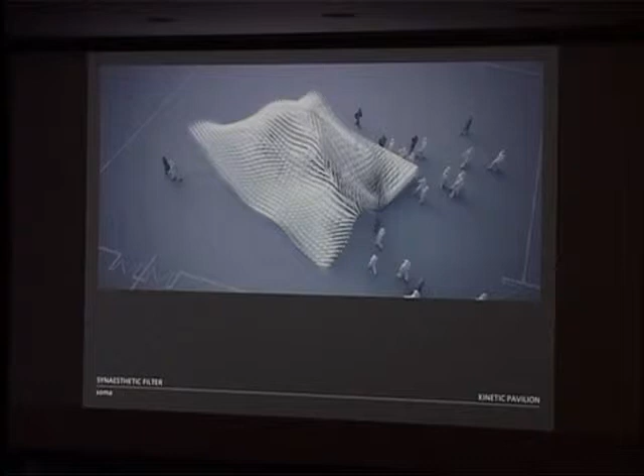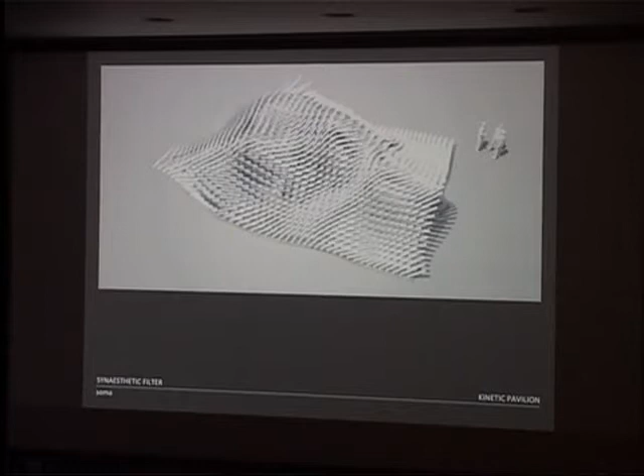Another reoccurring theme in our studio—these are now really very old projects, the projects we started our studio with—but a recurring theme is movement. We're really interested in how perception and kinematics are intertwined. This is a very early competition scheme for the new opera in Berlin, where we were trying to combine acoustic and visual triggers and create a music pavilion that we called a synaesthetic filter. By the simple movement and rotation of these reflectors, it would combine visual and acoustic qualities of the space and create these instruments composers and musicians could play with.

Another theme that we share, another interest, is our fascination for masses and volumes. So we're really interested in very simple elements that build up complexity, doing this by rules you can manipulate.

We call these vague formations, not only because the boundaries tend to be undefined or can grow or extend, but also because they have a certain potential to be expressive and evocative, and to be read and interpreted in many different individual ways by users. So they also have this kind of openness.

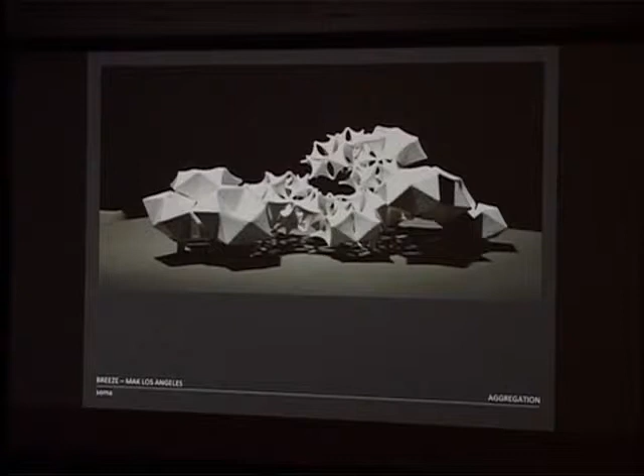In this case, this was what we did at the Schindler House. We were studying growth patterns of corals, and the base element is an octahedron that can change its state of phase from solid to sparse. We built it at the Schindler House as an installation that was actually breathing.

We had a latex skin and vacuum, and the breathing cycle was quite slow. It took like 15 minutes, so it was really at the border of noticeability. We really like this notion of a living organism.

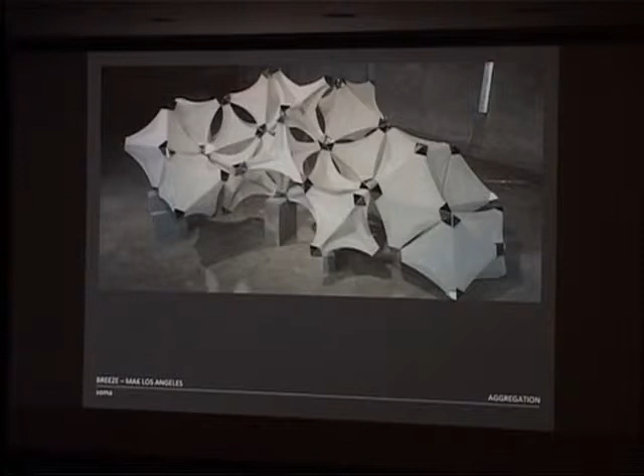We really understand design as an ongoing process that has to be explorative, and our projects are rather outcomes of this process. So we're always happy if we find a brief or a competition where we can test something we have developed. This was this lucky case when we did the mobile art pavilion for the Salzburg Biennale.

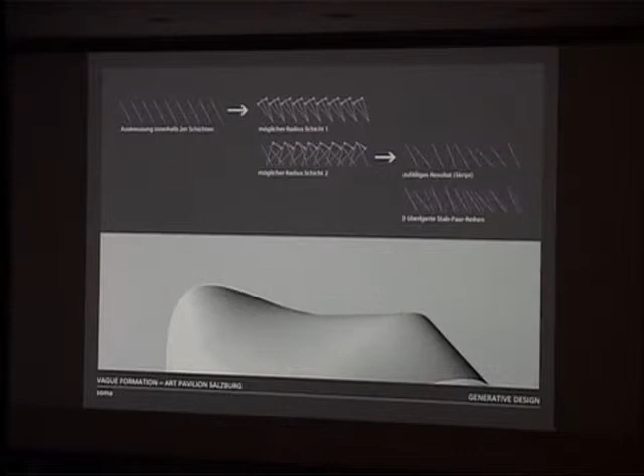What we took as a starting point for our proposal was the idea that rule and variation is inherent in architecture as well as in music. Contemporary music might sound really strange to our ears, but as soon as we start to engage with it and read its structures, we can really explore the very defined and controlled rules. So again, the rule is rather simple.

Layers of sticks in opposing directions create, in principle, a rather weak structure, and then by changing the angle they become performative, creating a stiffness that's really very amazing. So we wrote this random script and just played with it, trying to find out how many sticks we need to create this mass-like appearance, testing and doing loads of variations with these linear elements.

The idea was really to create this flickering mass we would put there on the Mozartplatz, and we were also testing it in physical models, so that's really how we work. We do not believe in hand drawings anymore. We do hand drawings if we need to communicate very quickly in the office, but we rather like to do these three-dimensional diagrams and then really test the architectural effects spatially.

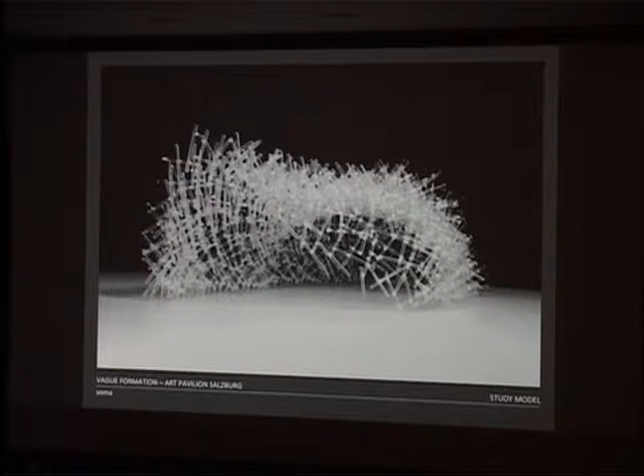What we were lacking, or what these outputs of this script did not have, was a structural evaluation. So we teamed up, as mentioned before, with these amazing engineers, Bollinger, Grohmann, Schneider, in Vienna. We are really happy since Klaus Bollinger was also our professor at the University of Applied Arts in Vienna, so this is really also something that helped us a lot doing this project.

They are doing research at the University of Applied Arts with irregular structures, and they're also developing a tool called Karamba, which is a plugin for Grasshopper. Together with them, we built up a parametric model where we could control and evaluate the structure. The great thing is that you now have a shared platform, so the engineer and the architect both manipulate the structure in one program. It's not a before and after, but really a simultaneous process.

So here you see how the evaluation takes place. The sticks start to move slightly and search for an improved position, so to say. They try to reduce the joints and the distance between them, since joints means money.

By doing that, they also enhance the structural performance and decrease deflection or deformation. In yellow, you see the deformation and how it gets better and better, until in the end the white and the yellow overlay. So then you have a so-called optimized structure, of course, within the architectural intentions.

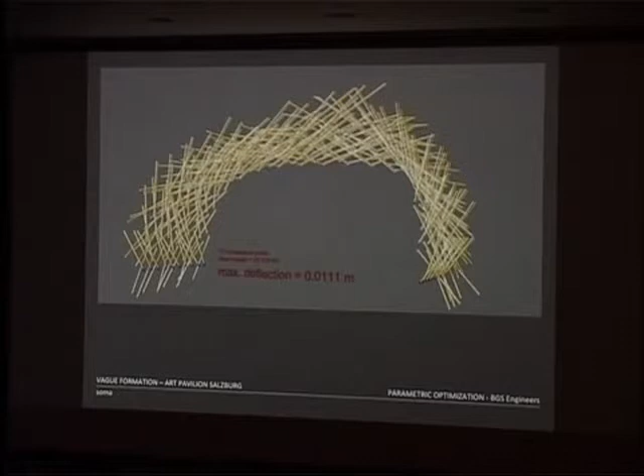All the 1,500 aluminium sticks are the same, but they all have different joints, so it's actually a huge puzzle. Logistics becomes a crucial topic. You need to really name everything. So the model rules everything. The digital model is really what you are working on.

You do not draw any more plans, since this would not have any sense. The only plans we were drawing were the ones we needed to get the building permission. Everything goes directly from the model to the CNC machines. And here you see also the picture.

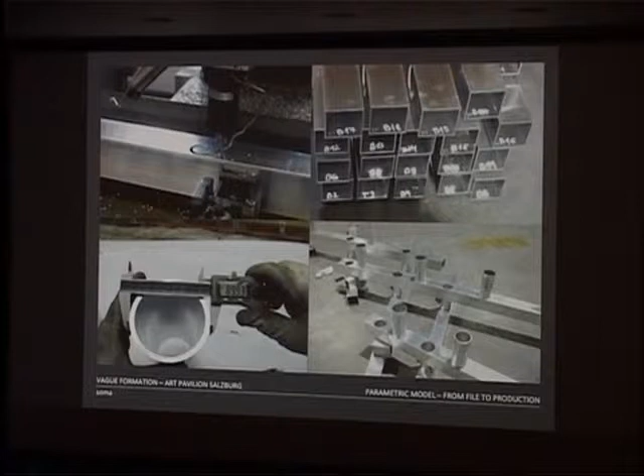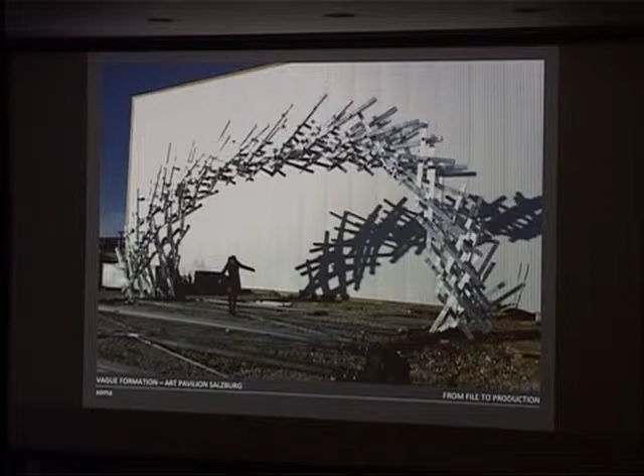And this is the mock-up. We had to test if the deformation was really not taking place at all, because all the parts had to fit together. And we were also testing how these parts could be handled, so they could be transported to the different locations of assembly.

Also, the interior is very modular, so you could react to the various events they would like to have in the pavilion. After it was used for the Salzburg Biennale, they also rented it out to other festivals. There were art exhibitions, design exhibitions, lectures, all kinds of events taking place in there.

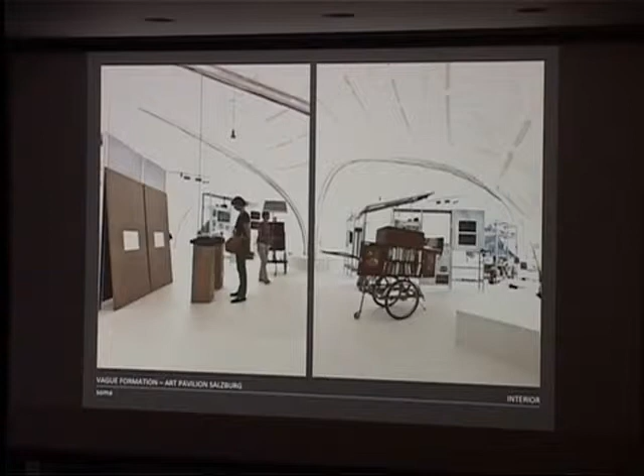And we also had an interior membrane, since we also needed to protect it from rain, but you could also assemble it without the membrane.

Yeah, this was the first assembly spot in Salzburg. It really got lots of very positive response from the audience as well as from the public, and it really was that strange appearance we were hoping to get. And when it was emitting these amazing sounds, it really was a perfect match for the music we found.

And then it traveled to the rural valley of Krakautal in Austria, and it was really interesting how the change of the context not only changed the reading of the structure itself, but also changed the reading of the context. And it got even more weird when the artists took over with their strange ceremonies and performances.

After that, it traveled to Maribor, and in the next 10 years it will be used, hopefully, throughout Europe. It was also nominated this year, among many projects, for the Mies van der Rohe Award. So we were also very happy and delighted about that.

The next project is the one that helped us get the job at the Bartlett, as you all know now. This is the competition for the Taiwan Tower. Actually, it follows quite the same idea as the Salzburg Pavilion, only in a much larger scale.

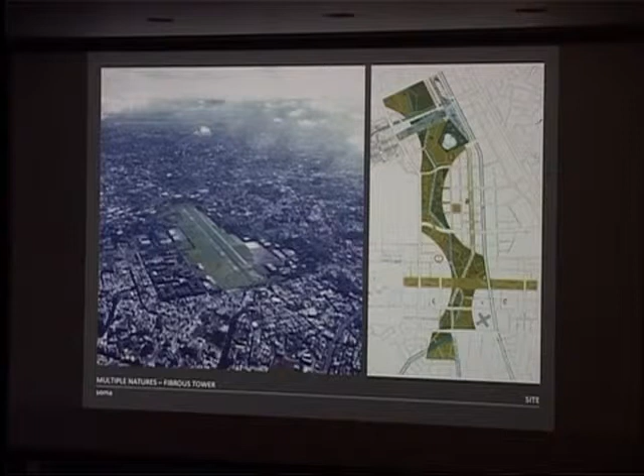The whole city development is planned to be zero carbon. So we were also looking at certain principles in nature, not only to get inspired and to get a geometry out of that, but also we were looking for certain principles we could embed.

The other idea, I think we can't really see that so well now, but the other idea is to invent a new tower typology. Usually these observation towers have these cores.

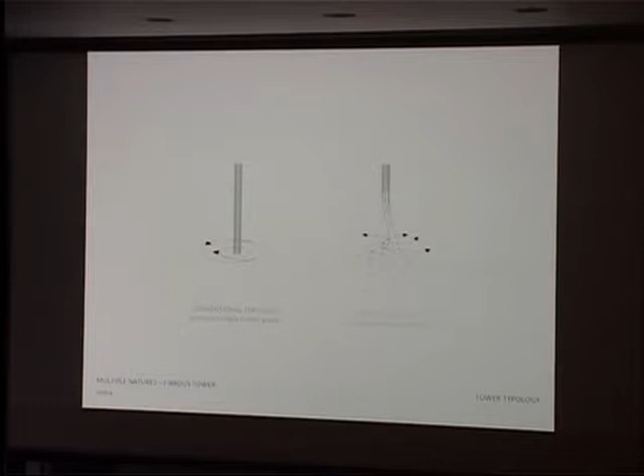You enter, and then by magic you reappear 300 meters up in the air, and you have this gap of experience. We proposed an open tower typology where you could experience all the areas of the tower, an open and free zone where you walk underneath the tower, and travel up between and along these open legs. So the tower creates an open field that is then filled up by the museum, and the park flows freely beneath the tower legs.

Here you see the ensemble of museum and tower and all the platforms, the intermediate platform in the middle of the tower and also the head. You're moving in transparent capsules along these legs, and it becomes a spatial, three-dimensional experience where you also have a changing panorama of the city and the surroundings.

When we got interested in these fibrous structures, we were looking again at natural principles, swarm behavior and plant movements, to understand how we could organize vertical linear elements to create synergetic wholes. These tests informed the tower's geometry as well as its organization and structural behavior.

It's really the way we start in the office, sketching three-dimensionally and collecting these ideas that inform the design. Here you see the fibrous tower again, these bundles of tower that have sub-bundles, so to say. It's all one profile of 35 centimeters diameter that builds up the whole tower.

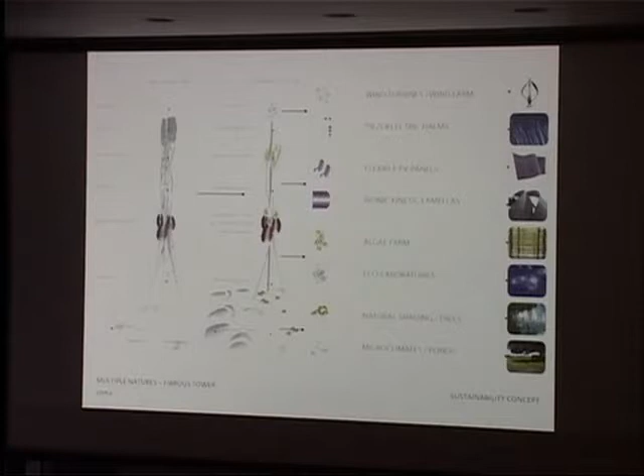What you should see here is that it consists of 8 bundles which have different functions. The inner ones have the circulation, and the outer ones contain all the programs, and then they are all intertwined into one whole.

We also worked with other amazing climate engineers we quite often invite to our projects, Transsolar from Stuttgart, and we were interested in using renewable energy, but not just applying it to architecture—we wanted to embed it. So we have architectural elements that could move and by movement create energy. We also had low-tech measures, especially in the park, to create microclimates with water and natural shading.

Here you see the generation of the tower structure done by Bollinger, Grohmann, Schneider. The tower structure is emerging, so to say, looking for the ideal position of these connections between the fibers.

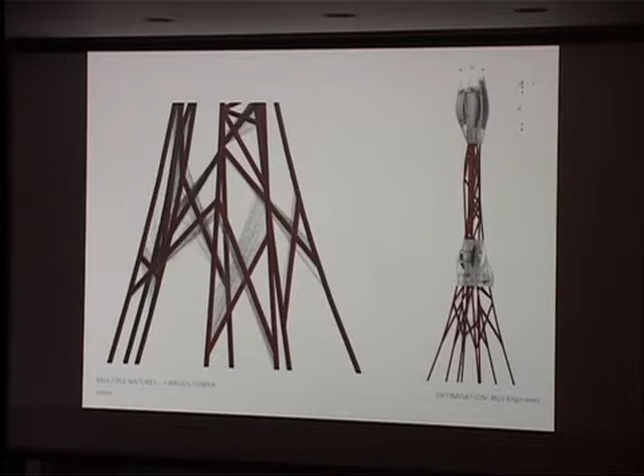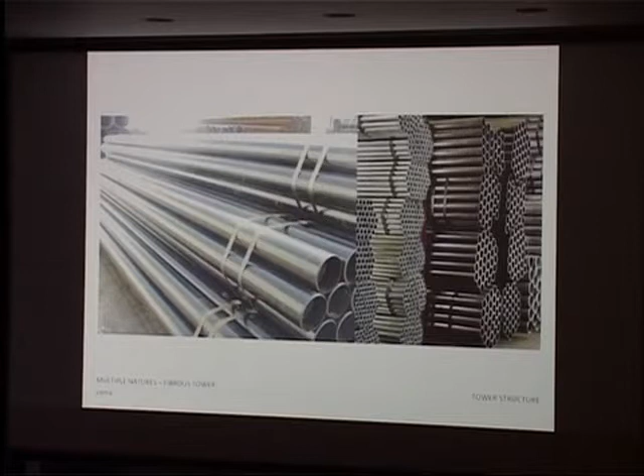Yeah, and that's the tube—this is really what you need to build it. It's available everywhere, and also in Taiwan. It was really a very clever idea by Klaus Bollinger to just use a standard profile.

We were testing the structure and found out it had many advantages. Not only could we reduce the welding volume, since you only had to weld these small tubes, but also, since the tower was open, it reduced the wind loads. And wind loads mean steel, and steel means cost. So in the end we found a very efficient structure, and we were really able to build this tower within the real budget, although it looked very complex—it had very simple inherent rules. Again, a view onto the tower and the museum, how it would have been built.

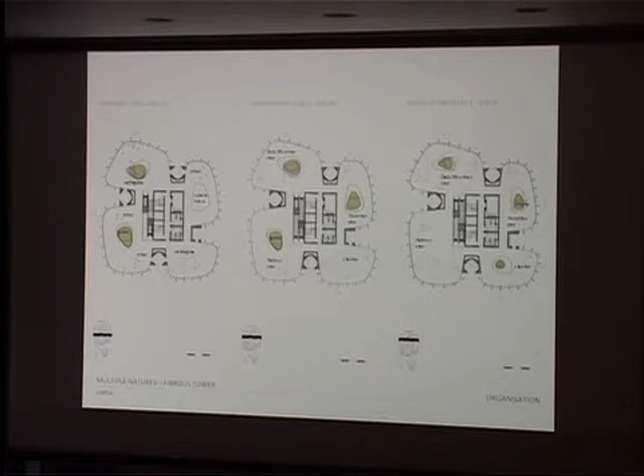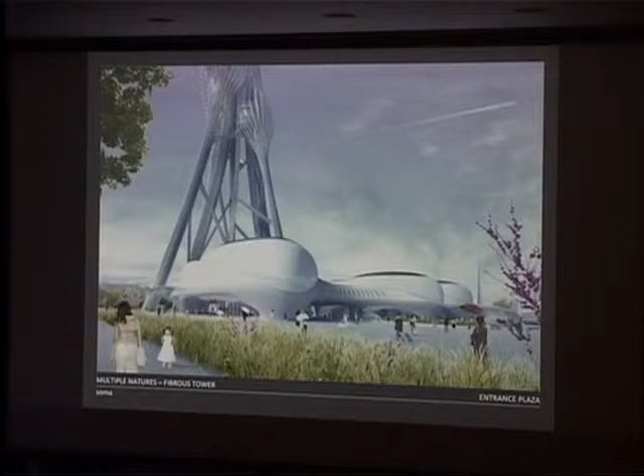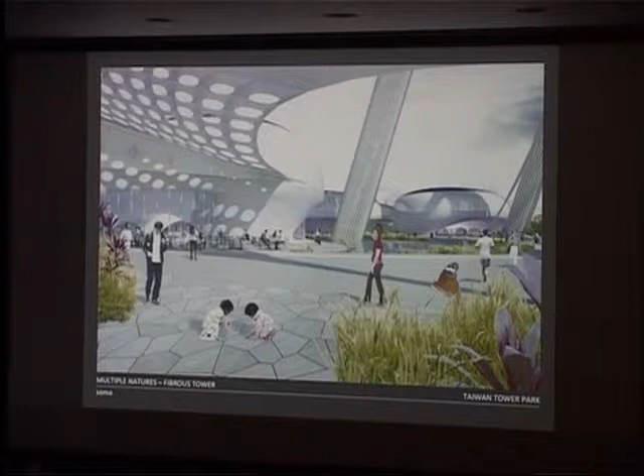On the park side, there are architectural elements that create these microclimates, becoming comfortable zones in the hot summer. The idea for the foyer areas was that the ceiling would be very articulated, and that the ceiling would be the element that creates the space and leads visitors through it, as well as in the tower lobby, where you have this kind of intuitive geometry that guides and creates these spatial flows.

Unfortunately, it did not get built, but we're still looking for a client. We have not given up hope yet that we will apply some of these principles in other projects.

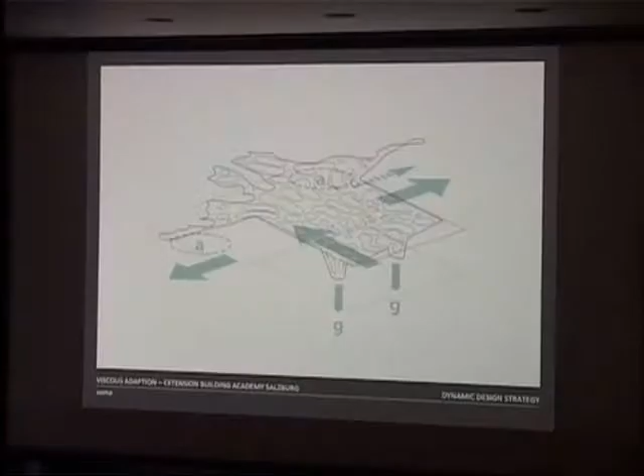So again, we wanted to do something that would create a very distinct atmosphere and a very consistent geometry, but it will also have many performances, so to say. On one hand, it is structure, it creates a roof. It has to provide natural lighting as well as artificial.

Then we had this idea, again, of the ceiling as this guiding system that would lead you into the concert hall, but also into the school. And then we wanted to have something that would, in a way, correspond to the existing structure, but on the other hand, be very consistent in its own geometry.

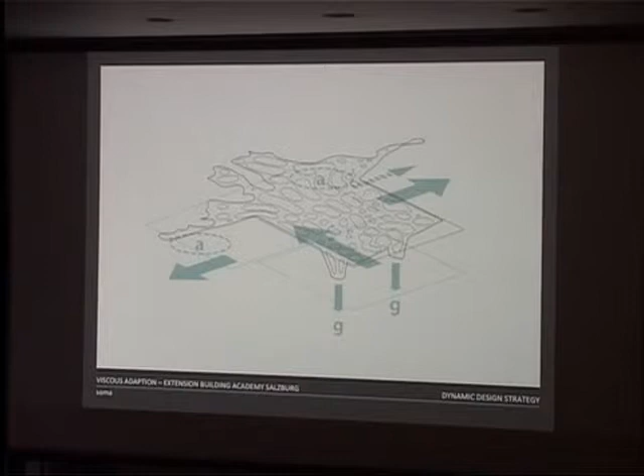So we were looking at particle simulations. In this case, we got interested in viscosity because viscous liquids have this property of being very coherent and consistent, and on the other hand, they can create holes, and that was really what we needed. So we were, again, doing these three-dimensional diagrams and testing a lot.

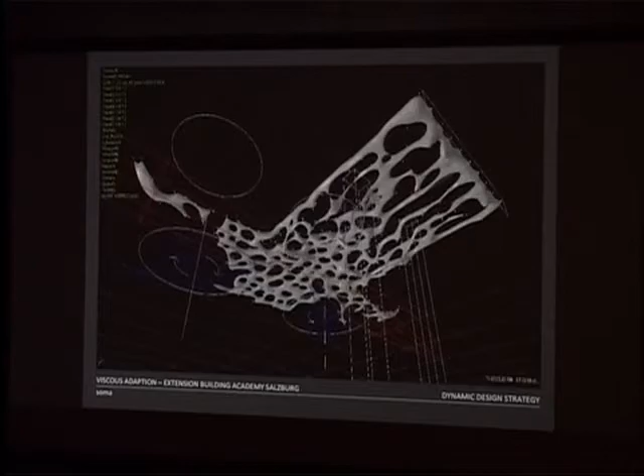This is the roof and the entrance landscape as well as the concert hall, and then we also did some office area on the other side.

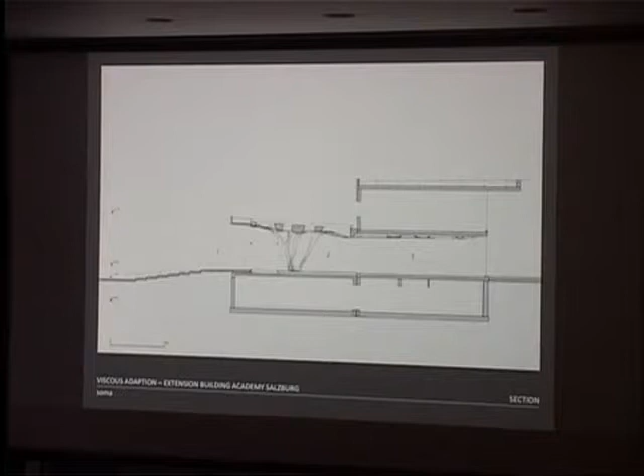In section, you see this idea of really creating this flow through the foyer. We really wanted to open up the whole space, so that you really get this transparency and this view throughout the whole space, and of course also back out to the surrounding.

So here you see how this roof performs a structure, but also generates light, and then inside it creates this continuity and also this guiding system into the concert hall.

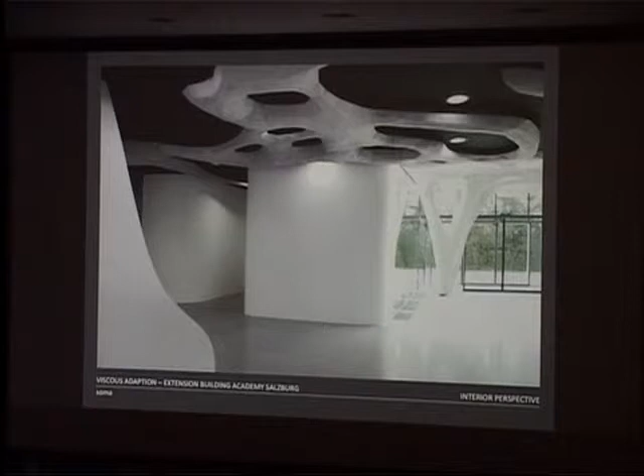Many of our projects have a research part, and that also is due to the fact that they're experimental in a way, and sometimes to implement them you really need much more effort, and you need to team up with engineers and experts. In this case, the most important topic for the client was really to be sure that there would be no cracks at all in the concrete.

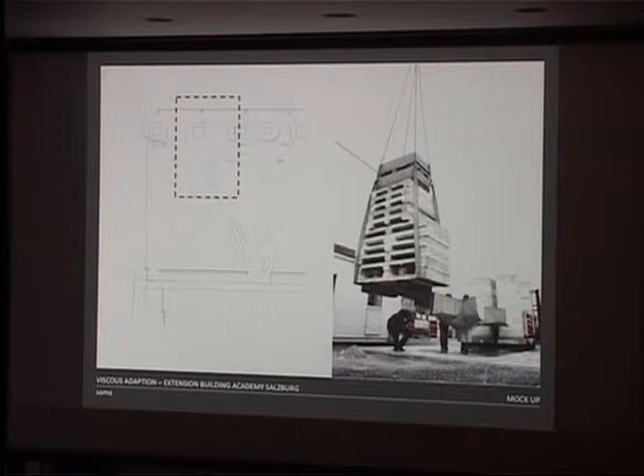So here you see the reinforcement, the work of the structural engineer. And then what was really important was the testing of the formwork, since the milling path really influences the surface articulation, the play of light and shadow. We tested various patterns, and we also poured them in concrete.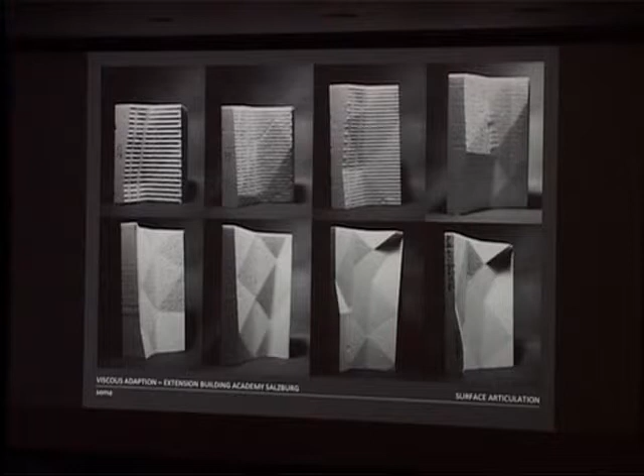Actually, that's what the school itself did, so they were also involved in the project. And finally, we decided to go for the finely triangulated version, not only because it would reflect the precision of the digital design and process the most, and it would not look handcrafted, but also because the play of light and shadow was just intriguing for us.

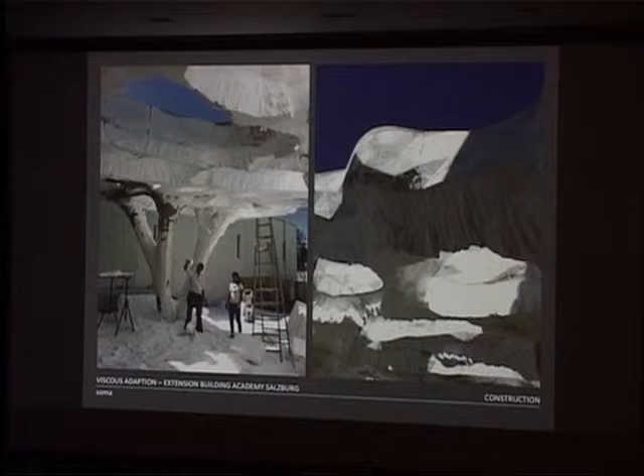Yeah, there are these moments when you go to the construction site and everyone who's working there just sees a big mess, but you just see beauty. So we really like that, but of course you can see what it means to have this formwork - you have to get rid of it again in the end.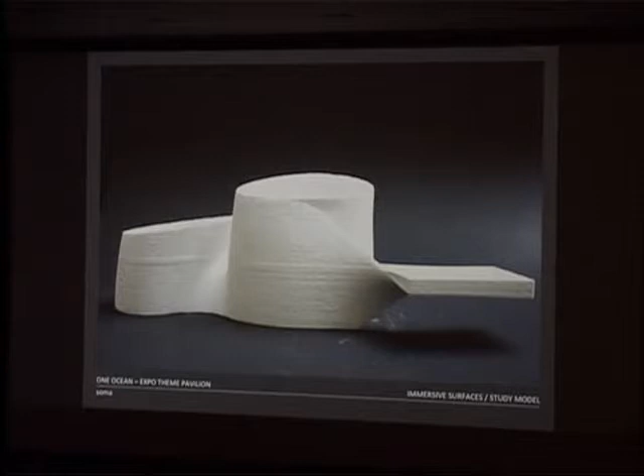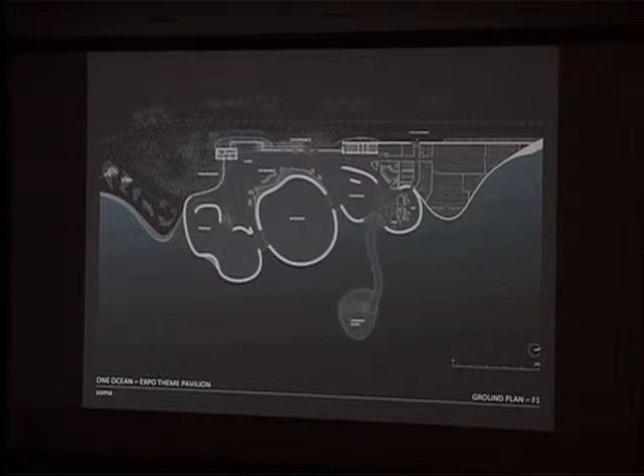So you enter here in the pre-show, go into the main show, the post-show, and then you go up to the best practice area. The cones also frame the view onto the ocean, and here you see the more flexible platform on the second level.

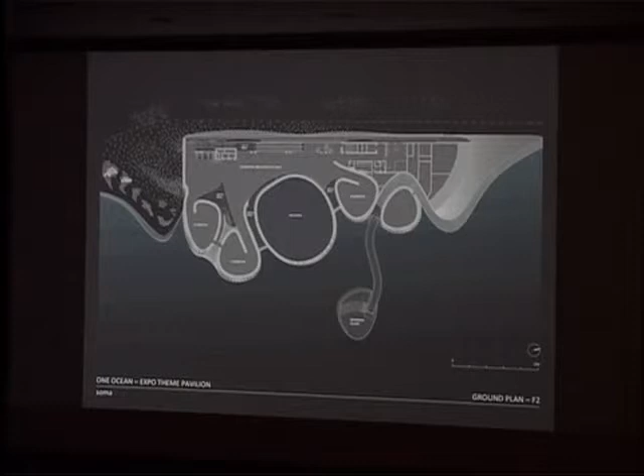In section, you see again this idea of continuity: the cones, the twist, and then they grow into the kinetic facade and back into the roof. In the longitudinal section, again the sequence of cones: the pre-show, main show, and post-show.

As you might have noticed, suddenly there are five cones. There were four at the beginning. We had to implement this main cone very late during the planning phase, which was anyway just six months.

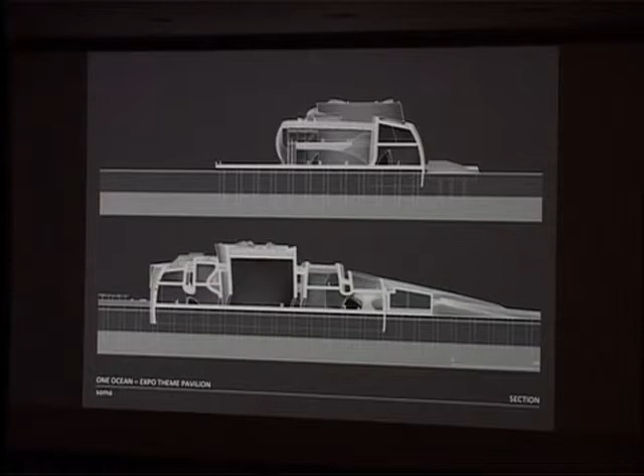The exhibition design changed, and then we had to react to that and implement the cone that was 20 meters high and 30 meters in diameter, which was quite a challenge, or not to say hassle, for the structural engineer. As you can see here on the right-hand side, the construction site, very early construction, the concrete is not even poured yet, and steel work already begins.

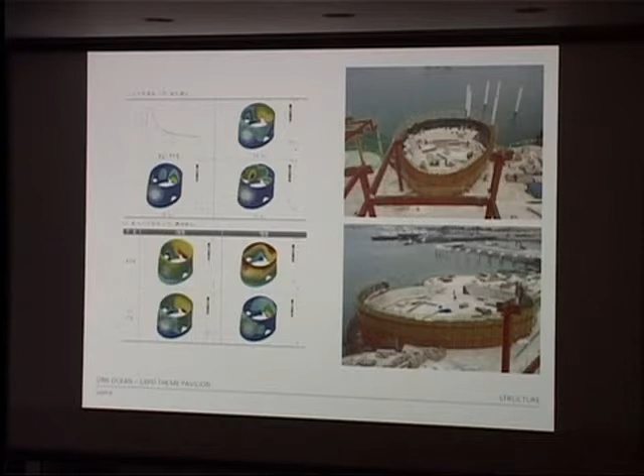This was really a very interesting time, as I mentioned before, but you tend to get nervous when you see that. So how can you do it? You need parametric models. You need to be able to quickly change things if needed.

This is just to show how we optimized, so to say, the triangular window. We were looking for the different sizes we would need to get these gradients of windows to become as efficient as possible during construction.

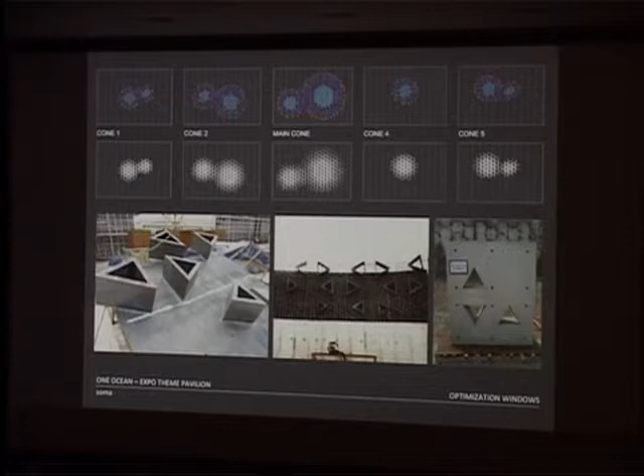And here you see the windows then in reality. The windows were mainly there for after-use, because the building is a permanent one. Nobody hopefully built an expo pavilion out of concrete.

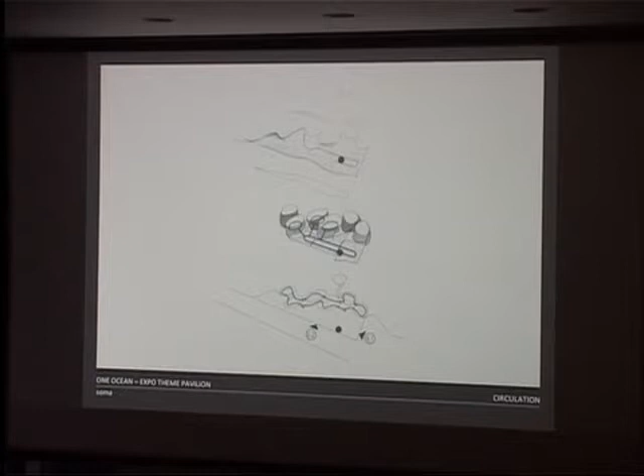What we added to the brief was a third exhibition level. Maybe some of you have been to expos and you know that expo is mainly about queuing, and that can become very frustrating when you just queue for hours in front of these pavilions. So what we wanted was a freely accessible roof, a path you could walk up to enjoy the sight onto the expo and the really beautiful surrounding there.

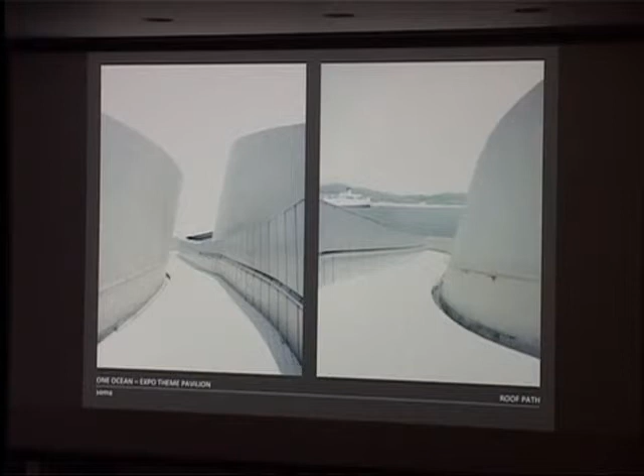So here you see the path meandering between the cones, and then like an architectural promenade, you walk up along the cones and have views onto the surrounding. This became a very popular place, especially during late afternoon and evening hours, and even more during nighttime when all these expo shows were going on.

It was a perfect spot to look down at the whole area, and people were really doing their picnics there and enjoying themselves. We never expected that this area would become so popular.

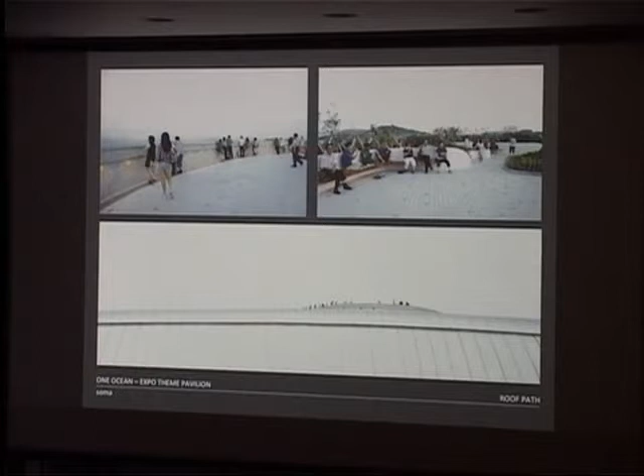As I mentioned before, it was really important for us to embed the expo's agenda and not just symbolize it, but really implement a climate concept where we would make use of the geometry and create a synergy with it.

We were working again with Transsolar on this project, and there were many means, but one was natural ventilation, since we could use the geometry of the cones to create these airflows.

The other idea was that we would use the height of the cone, so we would just condition the area where people would be walking around, while other areas that people would not access could just be hot. So we used thermal stratification, and by that we could reduce energy consumption. The first step was reduction of energy consumption, and then using renewable energy to do the rest.

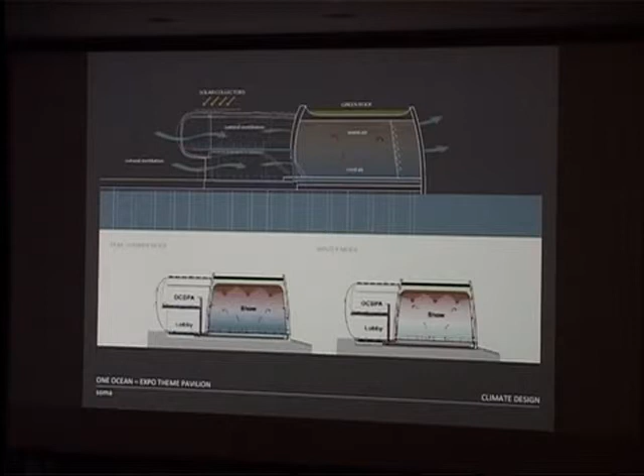Besides controlling the solar input, the facade was also the idea of having an analog media facade—the idea that architecture itself is already a medium, and that we could use architectural layers to create movement, patterns, and choreography out of these layers.

When we won the competition, we had already proposed this kinetic facade, and we were in shock that we now had to build it. We really had no clue how to build that facade, since we knew there was nothing out there like that.

So we went to Stuttgart and met Knippers Helbig, amazing engineers who also do a lot of research at the University of Stuttgart into kinematics and GFRP. They were really amazed by the idea of this seamlessly swaying facade with no hinges and nothing mechanical. We teamed up, and we were really proud that we could turn this project, within a very short planning period, into a research project. We now hold the patent on this facade together with them.

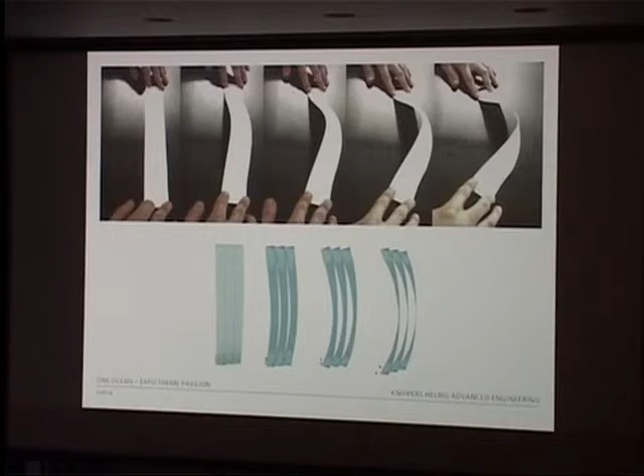So actually, it's not high-tech in the sense that the technology itself is high-tech. The material has been known for years, but it's really the thinking, the different approach, that makes it novel.

All the lamellas follow the same radius of 17 meters, which makes construction really efficient. But of course they all vary in length—the whole facade is 140 meters, the longest lamella is 14 meters and the shortest is 3 meters—so they also all vary in their build-up.

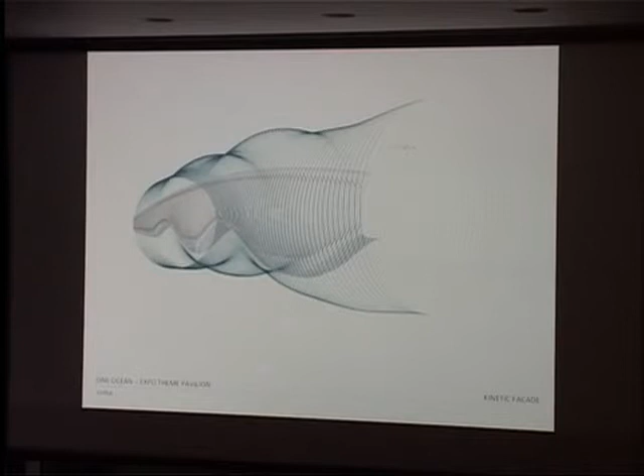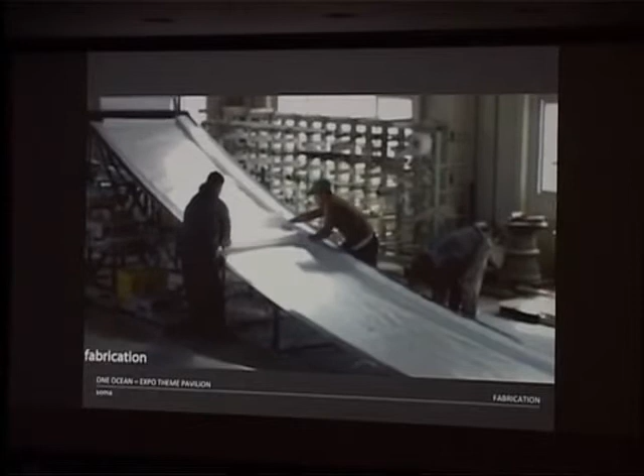You will now shortly see how the lamellas were fabricated. It's actually a very simple, hands-on process. As I said, the technology isn't high-tech—it's actually low-tech and well known.

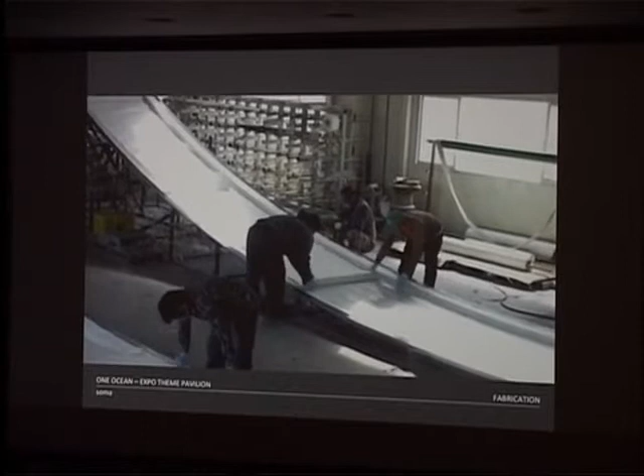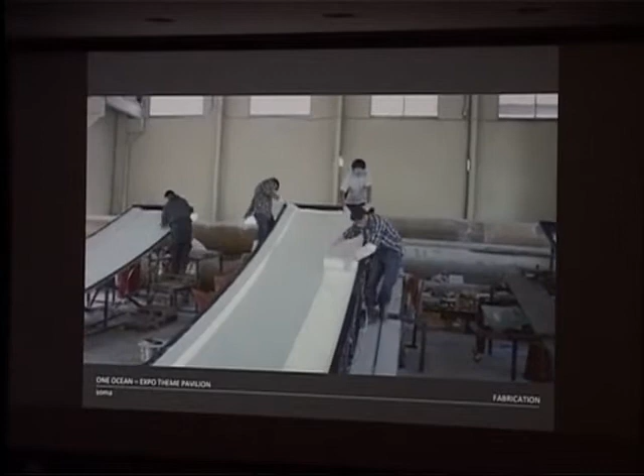You could have used one negative form, but since we didn't have a lot of time, we used three. Here you see how these fiber mats are rolled out. Every lamella has a different build-up of these mats, and they all differ in thickness—approximately 9 millimeters, so they're really very thin blades.

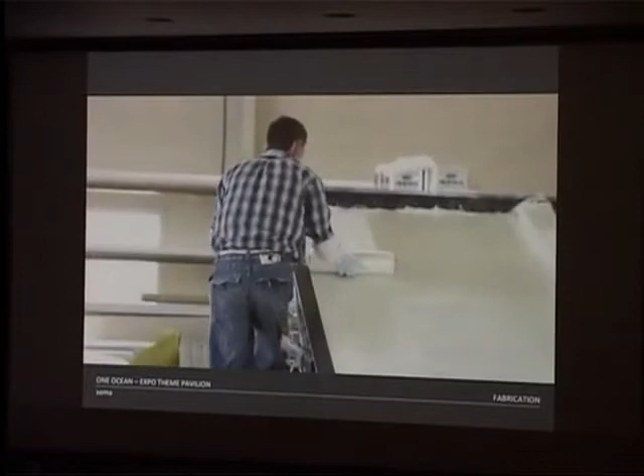They're also L-shaped, so they're stiffer on one side than the other, and that's what results in this movement—this opening up on one side. They're also elastically deformable, which is what GFRP can do.

Here you see how it's made. Actually, everything happened at the same time—while in the hall they were fabricating the louvers, outside they were testing them and programming them. It all happened in a very short time.

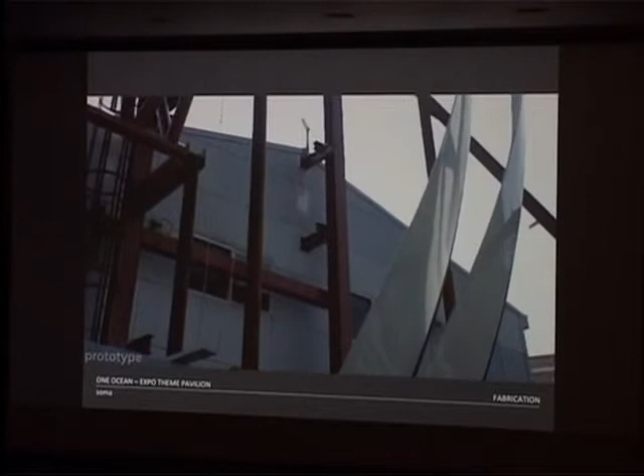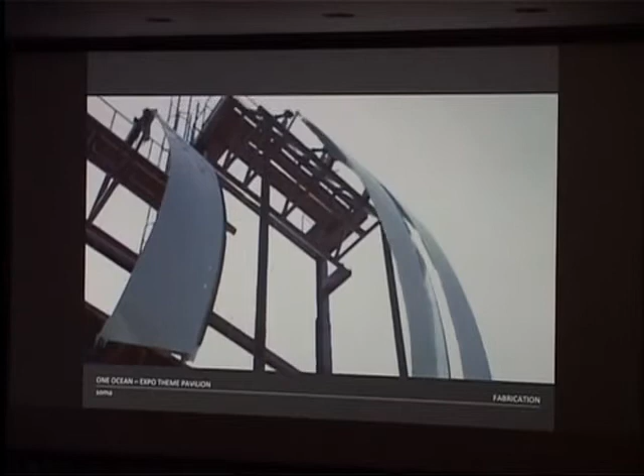Here you see the mock-up outside the fabrication hall. The longest and the shortest lamellas were tested, not only to see how precisely they would close and open—which was very important, since there's a lot of wind in Korea, and when the wind comes the lamellas get sucked back from the actuators and really have to close—but also to test durability.

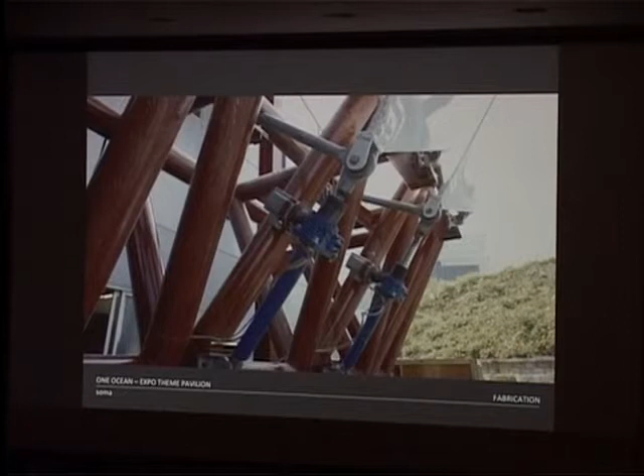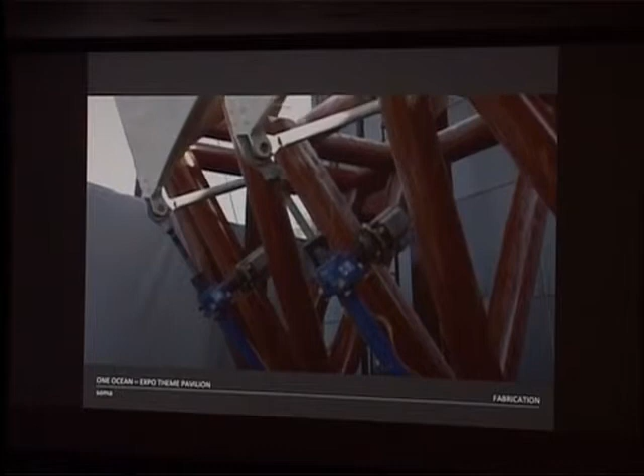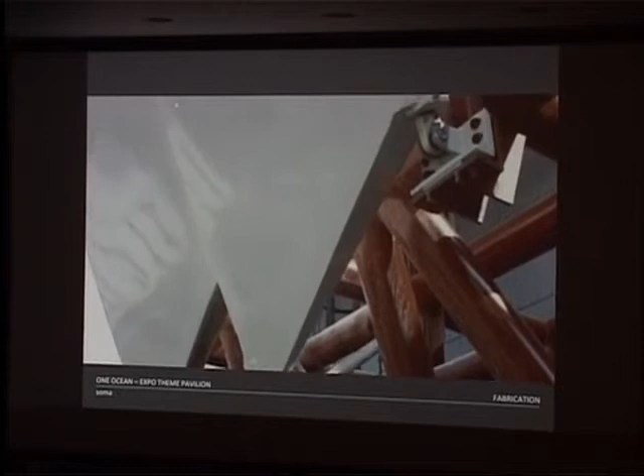Especially these connection points are really crucial, so they were tested over months. The whole mock-up ran constantly to see how this repeated opening and closing would affect these crucial points. As I said, these spindle motor actuators move the lamellas just a tiny bit, and the resulting movement is this big opening of the lamella to the side—a very efficient way of movement.

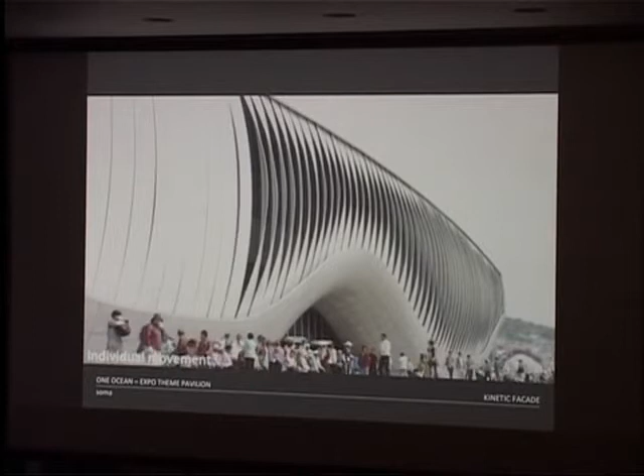The principle of bending was deduced from plants' movements and came from research done at the ITKE in Stuttgart. If you're interested, we also published a book recently with all this information in it, which is also in the Bartlett library now.

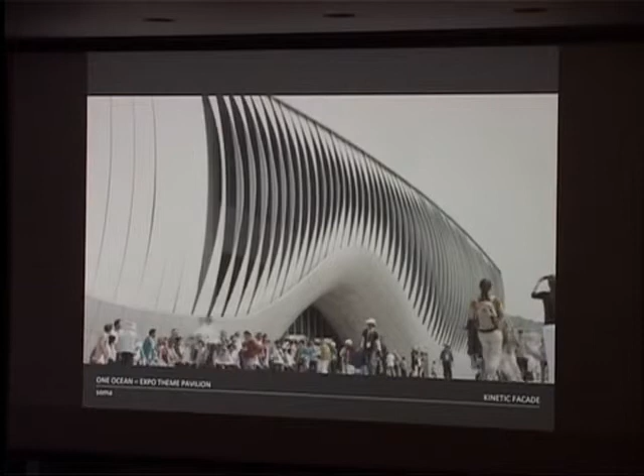Here you see how it's opening and closing. There's really nothing behind it, it just opens seamlessly. I think that's also why people were so astonished, because a movement where you don't see the cause is still one of the strongest sensations you can have. So these up to 50-meter long blades were just opening without any construction behind.

You could actually move all the lamellas individually and create all possible patterns. At the expo, they just did this opening and closing pattern. But since the building will get a new owner soon, hopefully for a cultural use, we really hope the new user and owner will like to play with it and probably invite artists to play with this analog media facade.

So in principle, you can use it during the day, but also during night. The client wanted LEDs, so it also works as a conventional media facade, something we were not really longing for, but well, we had to implement it - it's the client's wish. So it worked both ways: during day it had this analog choreography, and during night it was playing whatever the client wanted to play.

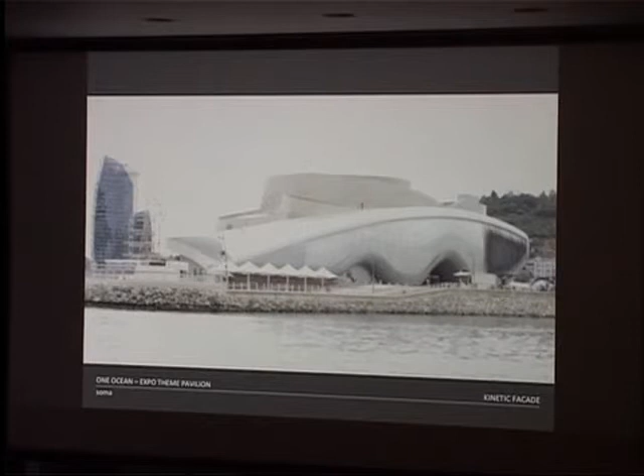The lamellas are really a combination of geometry and material performance, and although they're really simple, they create a very complex and astonishing appearance when they are moved.

Here it is, the building with its eyes closed. The expo is over, so it's waiting for a new owner and a new use. As I mentioned before, the book is in the library. If you have questions, we are here and happy to answer them. Thank you for your attention.